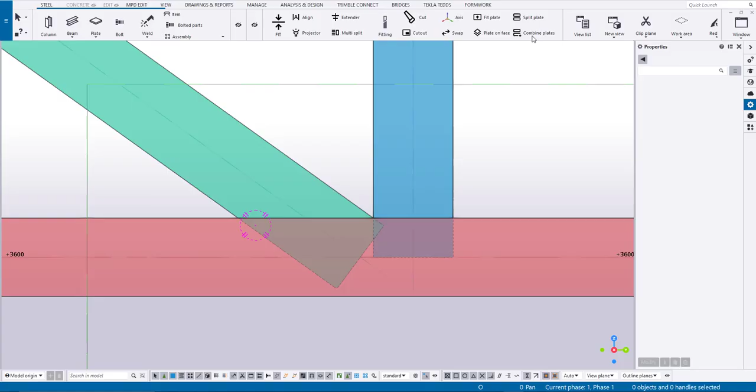We have redesigned the plate on face utility. Now, plate properties are loaded from standard attribute files found in the model or the company folder.

You can create a plate along the face of a part or along a polyline, and you can set a positive or negative gap. Then we trim these plates using the split plate utility.

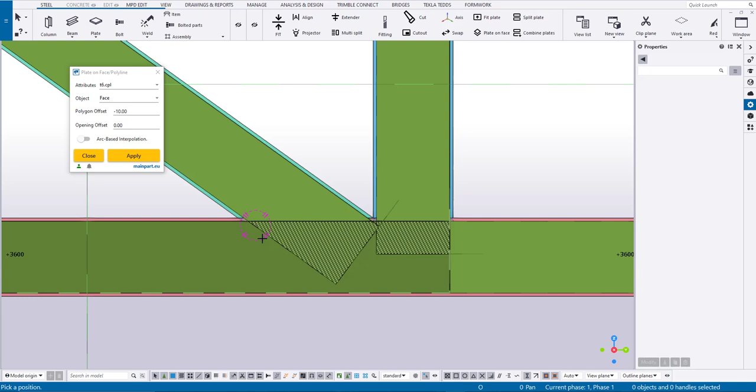It's convenient to use relative snaps. Hold the Control key and click the mouse to select a base point and set the required size relative to it.

Remove any unnecessary plates as they are no longer needed.

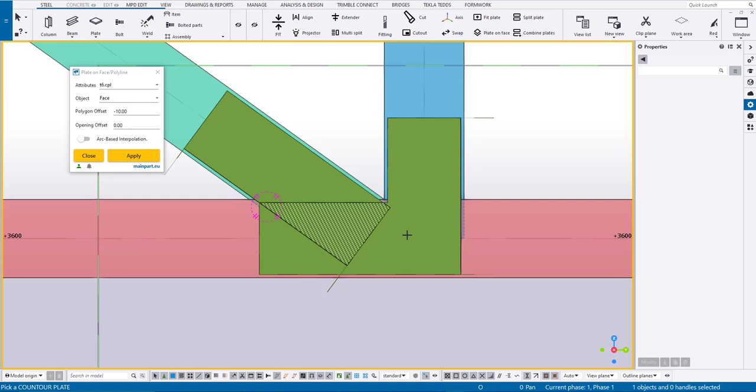Using the Combine Plate utility, we merge the plates into one contour plate. All operations are done using geometric constructions.

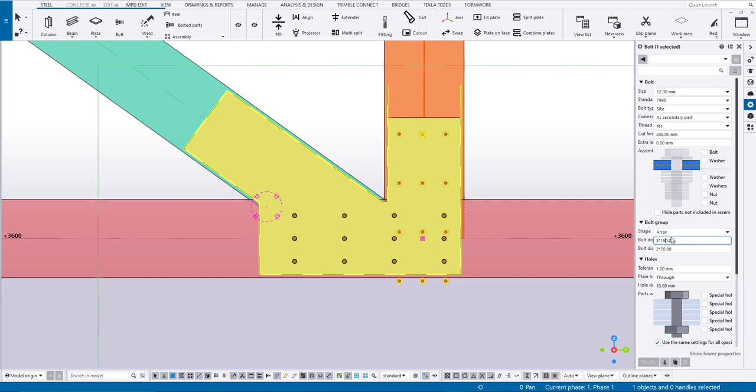Next, we create bolts, or in our case, dowels with a diameter of 12 mm. I really like the new bolt properties in Tekla Structures 2024. After creating the bolts, you can edit them, but to demonstrate the connection method, we'll leave everything as it is.

Now, move the plate to the center of the beam.

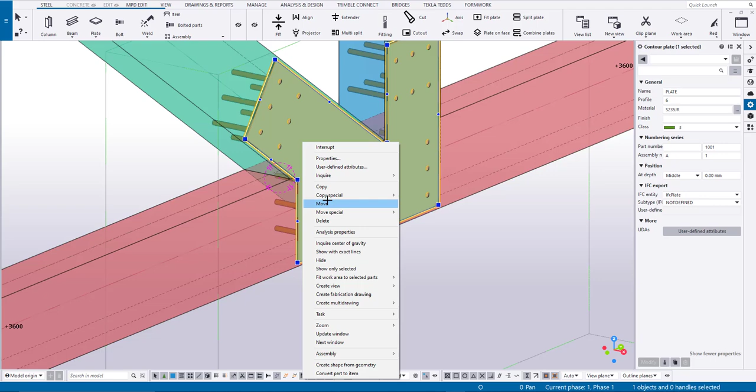It's time to use the updated cutout utility. In the new version, it's very convenient to cut beams with plates and set the required gap both on the sides and ends of the plate.

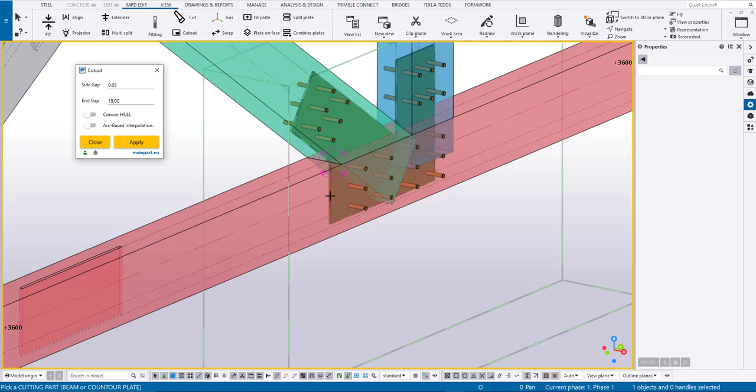First, select the steel plate, then all the wooden beams we need, click the mouse wheel, and all cuts in all the wooden beams are made instantly. The result is excellent.

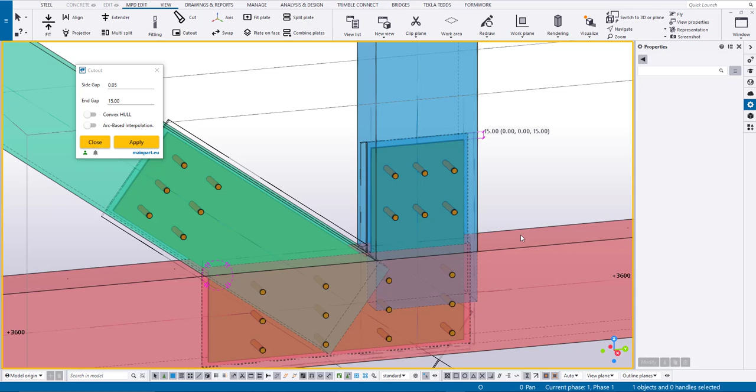This was the work on improving our utilities in the new version. Thank you, and I hope you like it.